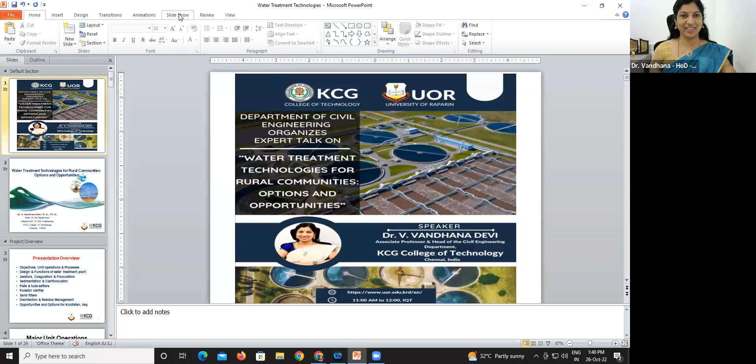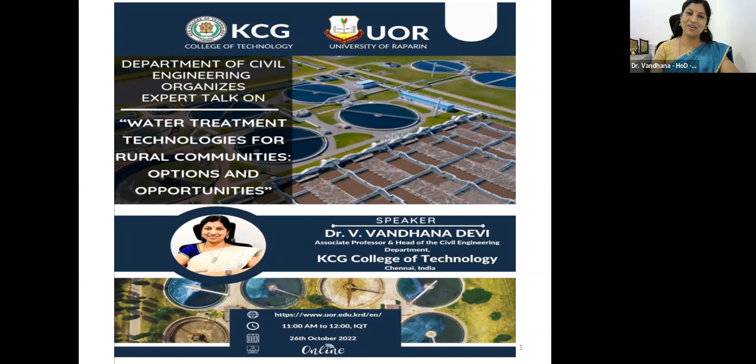Thank you so much for giving me the opportunity to deliver an expert talk on water treatment technologies for rural communities, especially for regions of Iraq, parts of Kurdistan near your university. What are the options and prevailing opportunities? I would like to deliver this topic for the benefit of budding civil engineers.

Let me proceed. So sir has given a brief introduction about myself. I'm heading the civil department at KCG College of Technology, which is located in Chennai, India.

My presentation will be about the objectives of unit operations and process, and then I'll elaborate on the design and functions of water treatment plants - operations like aerators, coagulators, flocculators, and the principle behind sedimentation and clariflocculators. What are tube and plate settlers? What are pulsator clarifiers? And we'll move on to sand filters, like rapid sand filter and slow sand filter, the types of filters we have. Then the final topic will be about disinfection and residue management, and we'll discuss the opportunities and options for Kurdistan, Iraq.

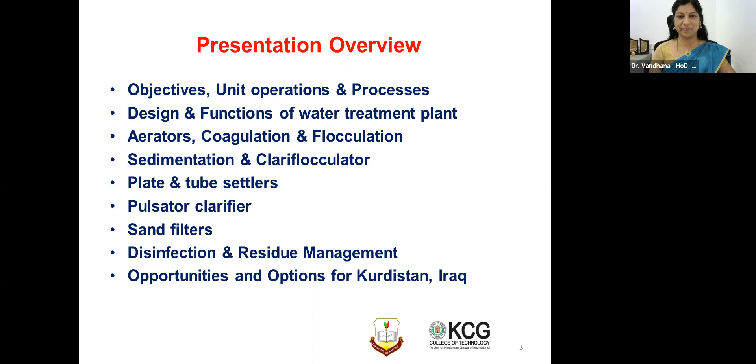Yes, coming on to the water treatment operations. Before I start with the unit operations and process, I would like to emphasize the objectives of water treatment. I was told all of you are civil engineering students, and some of you may be thinking civil engineering is just construction - construction of buildings, development of infrastructure, that's all, right? But we don't stop with that. I always say civil engineers are only next to God. Okay, so we are the boss.

To put it in simple words, we are taking care of the supply of water. When I say water, it is pure water - purified, treated water to the public. You can also imagine who is supplying water to your university. Just start thinking - who is working behind this water treatment process? It is the environmental engineer, who is a civil engineer, right?

Okay, so there are a lot of methods and processes in water treatment, right from the source. For example, the source for your water supply at your university will be the nearby river - I think it must be the Kosa river or the Aksu river. From there we collect the water and take it to the water treatment plant, which is being done by your Erbil Water Directorate. So you have three water treatment plants in your locality: Soren Water Treatment Plant, Kirkuk Water Treatment Plant, and Kani Water Treatment Plant.

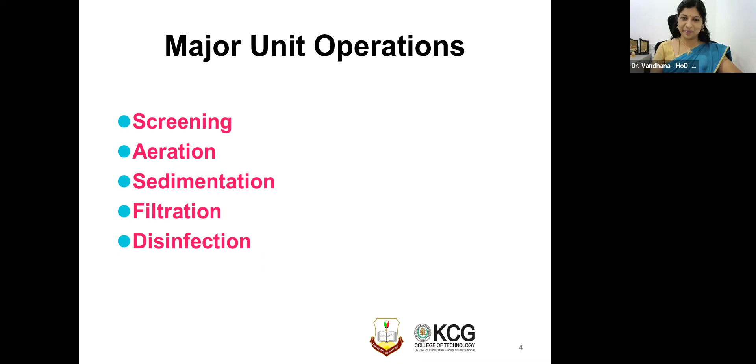Then comes the flocculator, sedimentation. All these tanks are meant for a simple process of settling. The heavier particles settle down.

Sedimentation is otherwise known as settling due to the gravitational force. In order to speed up the process of sedimentation, you can add coagulants like aluminum sulfate, Al2(SO4)3, 10H2O, so that the detention time will be reduced. For example, the plain sedimentation tank, if the detention time is 6 hours, if you are adding coagulant, then it becomes 2 to 3 hours. 2.5 hours will be the detention time for a coagulant tank.

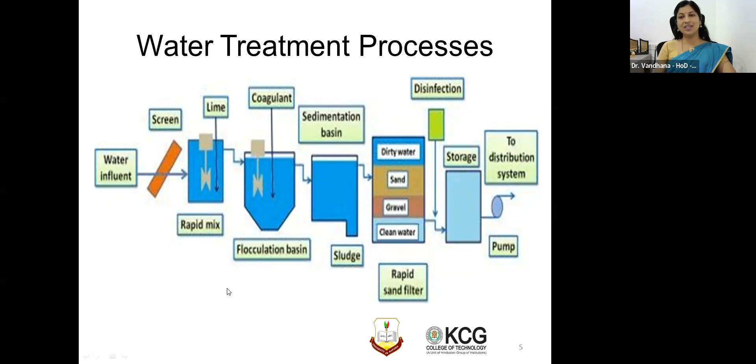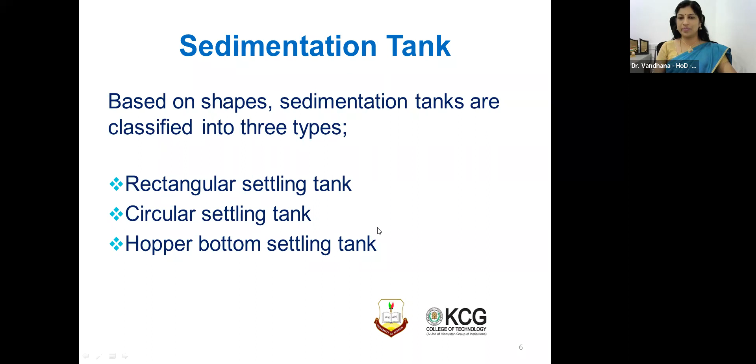Let me move on to the sedimentation tank. So based on the shapes, we have three types. One is rectangular, then comes circular, and then hopper bottom settling tank. Sedimentation tanks are also known as settling tanks.

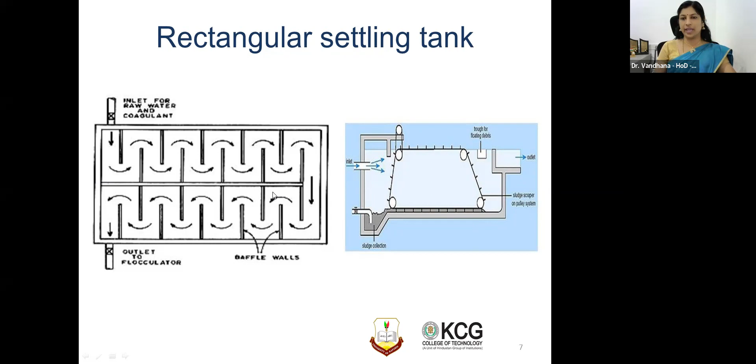Hope all of you know what sludge is. Sludge is a semi-solid material, something like waste, obtained from the water treatment process. The heavier particles settle down, and over a period of time, say a week or within a month, they form a semi-solid material. That is known as sludge.

This sludge is rich in nutrient value, and you can even use it as fertilizer or manure for your trees and gardens. In fact, in Chennai, we have started using it as manure, and this is a small scale business. In our campus also, we have a water treatment plant and a wastewater treatment plant. The sludge obtained from the tanks is dried in the hot sun and then sold, and also used as manure for our own gardens within the campus.

So you guys also can plan something for your university campus. If it is already done, that's well and good. This sludge has got 98% nutrient value, which is very good for the growth of plants and other trees.

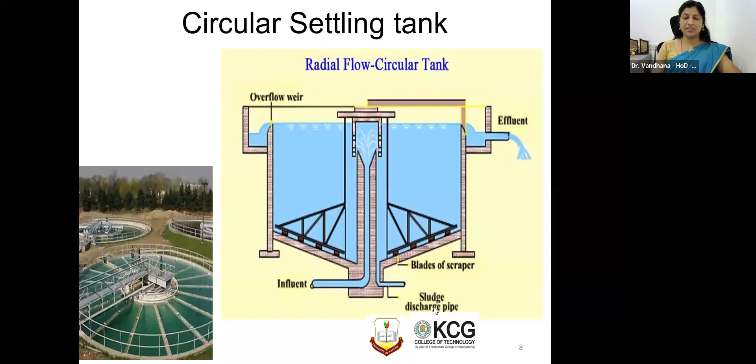When I was focusing more on the concepts, sir told me to throw light on the design of a few tanks. So let me start with the design of the sedimentation tank. Before we get into any design, we must know what the design criteria is.

In this course, whatever we discuss, every design has got certain design criteria. In simple words, they are nothing but assumptions. If we are thorough with the assumptions, then easily you can design the tank. It is not like reinforced concrete structures or steel structures. Here, most things are assumptions, and those assumptions are based on repeated studies conducted by fellow researchers and also by practicality. You will get that idea, I'll tell you.

The first one is the detention period - how long the water is going to detain or retain in your tank. For plain sedimentation, as I told you, it is 3 to 4 hours. And for coagulated sedimentation, it is 2.5 hours.

Then comes the horizontal velocity of flow. It should not be more than 30 centimeters per minute. Then coming to tank dimensions - when I say design, you are going to design the length and width of the tank and also the depth. Always the length is 3 times the width, or 5 times the width of the tank. The length is always bigger. So you can assume L is to B as 3:1 or 5:1.

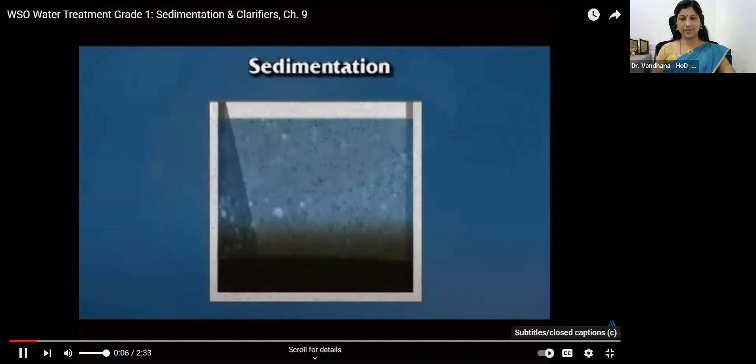Hope it's visible. Once proper floc has formed, it must be separated from the water through sedimentation or clarification. This process takes place in a rectangular, square, or round tank called a sedimentation basin or clarifier.

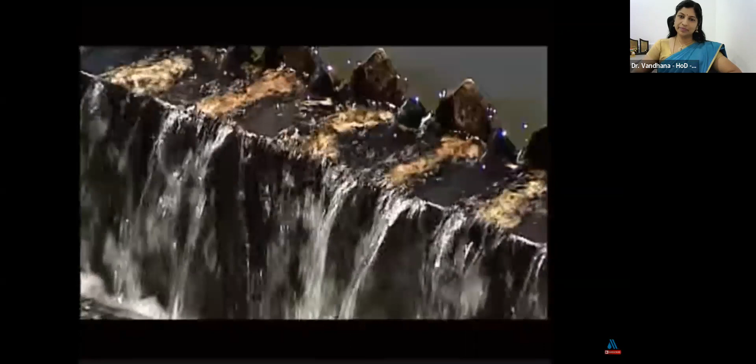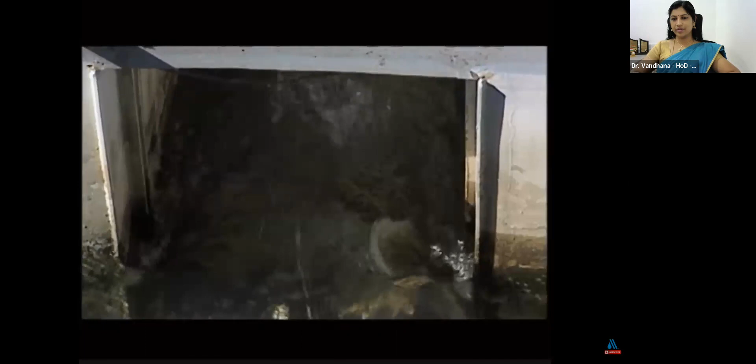It should be noted that direct filtration plants do not include a sedimentation or clarification unit process. Solid particles are kept in suspension in water as long as it flows with sufficient velocity and turbulence. Sedimentation removes floc by slowing the flow of water and decreasing turbulence. The heavier floc particles drop to the bottom and clarified water is collected from the top for filtration.

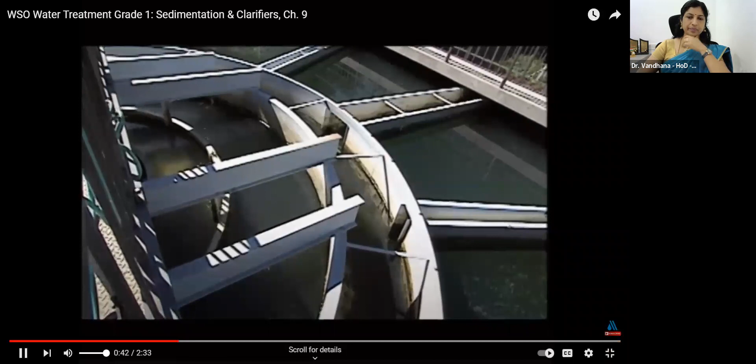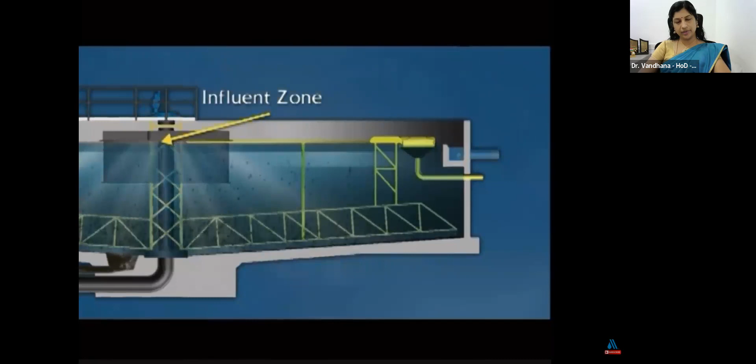Traditional sedimentation basins have 4 zones. First, the influent or inlet zone decreases the velocity of the incoming water and distributes the flow evenly across the basin. Second, the settling zone provides the calm area necessary for the suspended material to settle.

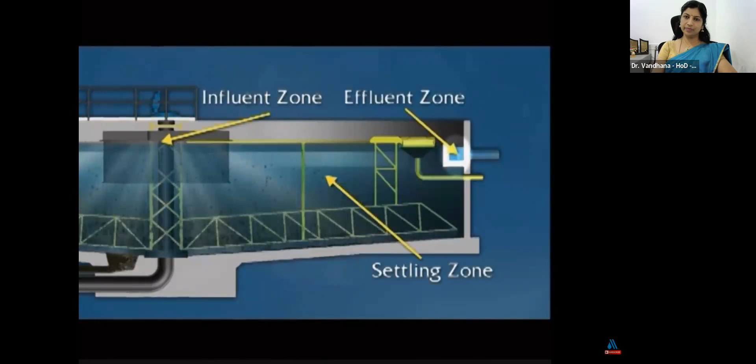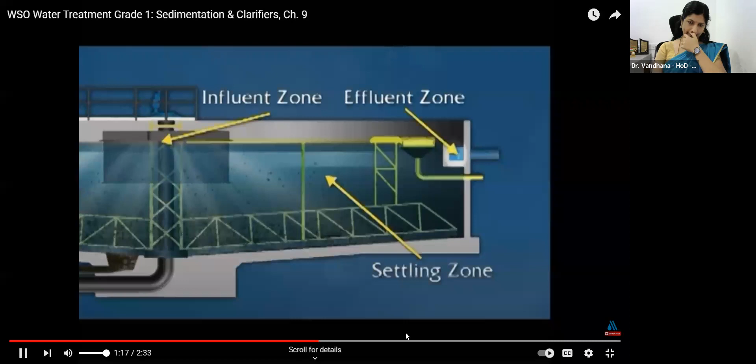Third, the effluent zone provides a smooth transition from the settling zone to the effluent flow area. It's important that currents don't stir up any settled solids and carry them into this area. Fourth, the final zone is the sludge zone, where settled solids are separated from other particles in the settling zone.

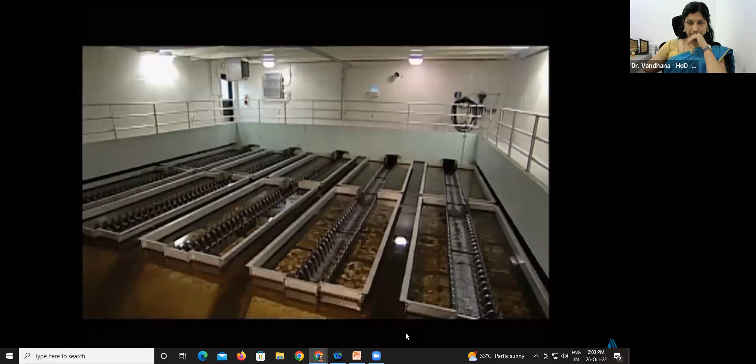There are many variations in design for sedimentation basins. The two most common types are rectangular and circular clarifiers. In a rectangular clarifier, water flows across a rectangular basin.

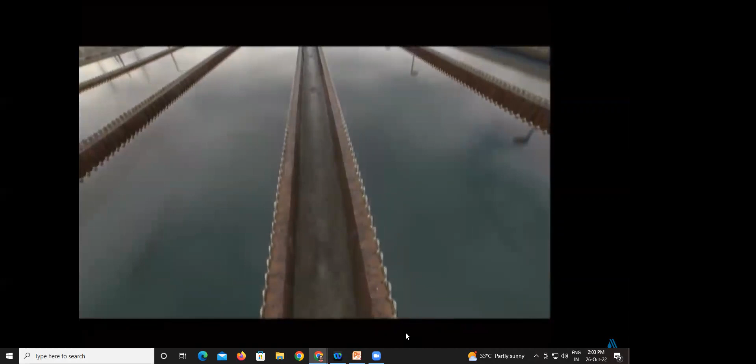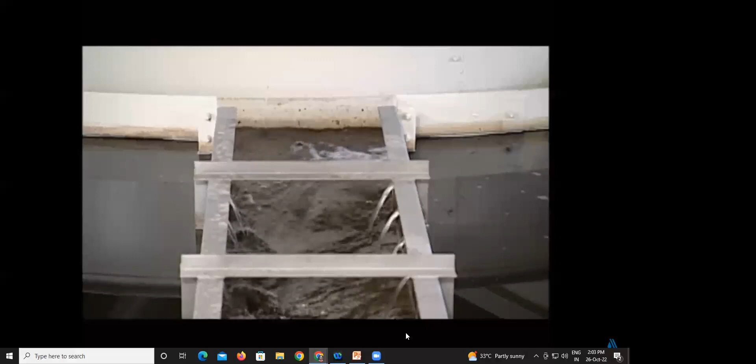A circular sedimentation basin can be either center-fed or perimeter-fed, where water is introduced to the clarifier in the center or on the perimeter, where the water is allowed to flow unperturbed throughout the basin.

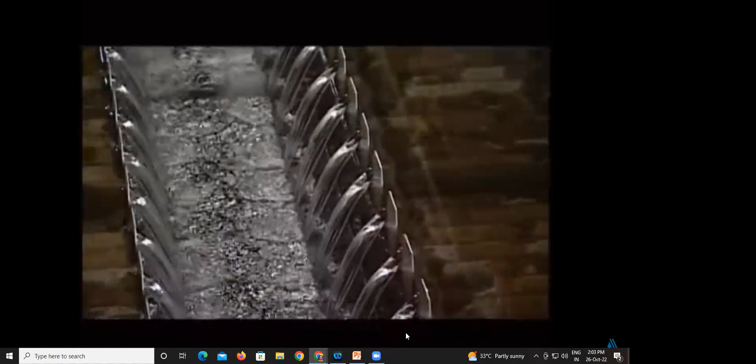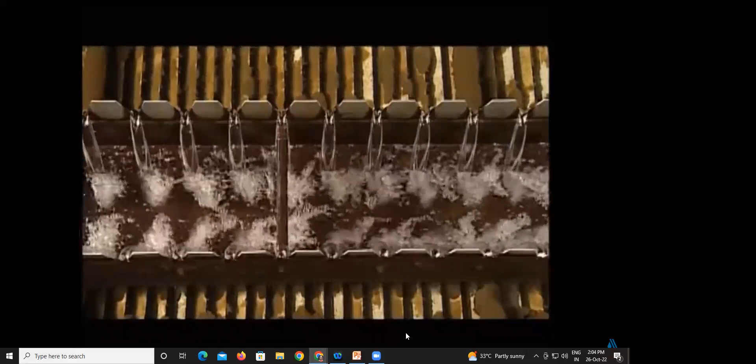Plates and tubes may also be used to increase the surface area available for settling, allowing for increased flow rates and enhanced settling in a smaller basin. As water travels up through them, instead of having to settle as much as 10 or 15 feet, particles have to settle only a matter of inches to reach the surface of a plate or tube.

As particles continue to settle out and build up, they can slide down the tube or plate and eventually settle to the bottom of the basin.

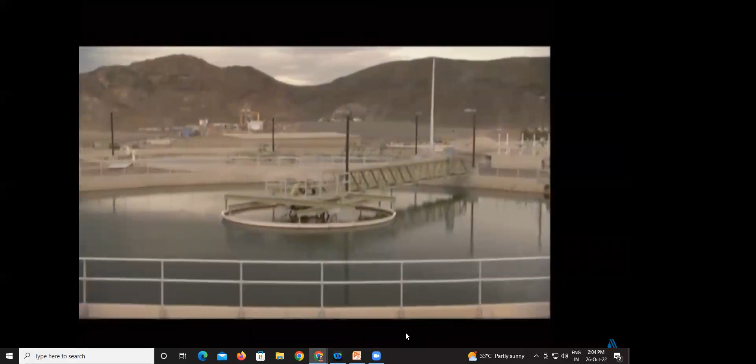Yeah, hope you guys got some idea. Somebody recently asked me how this works, right? What would... sorry, just give me a second.

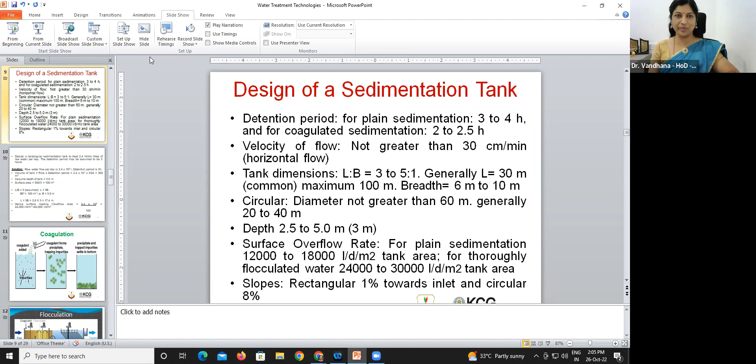So let's move on to the design now. Hope all of you are clear with the working principle of sedimentation tank and the design criteria of sedimentation tank. Fine, let us see the design problem.

We are going to design a rectangular sedimentation tank for treating 2.4 million liters of raw water per day, and the detention period may be assumed to be 3 hours. This is what is given in the problem. Sometimes they will just give you the population, for example, design a rectangular sedimentation tank for a population of 1 lakh. That's all that will be given in the problem.

And the rest of the parameters, everything we are going to assume. In this case, detention period is given; if not, we can assume it as 2.5 to 3 hours. So the first step would be to determine the volume of the tank.

The volume is given by the flow, which is already given in the problem, into the detention period. In this case, it is 2.4 into 10 power 6 liters. We are going to convert liters to meter cube, just divide by 1000, since 1000 liters is 1 meter cube. Then multiply it with the detention period, which is given as 3 hours. This 24 is nothing but the 24 hours in a day.

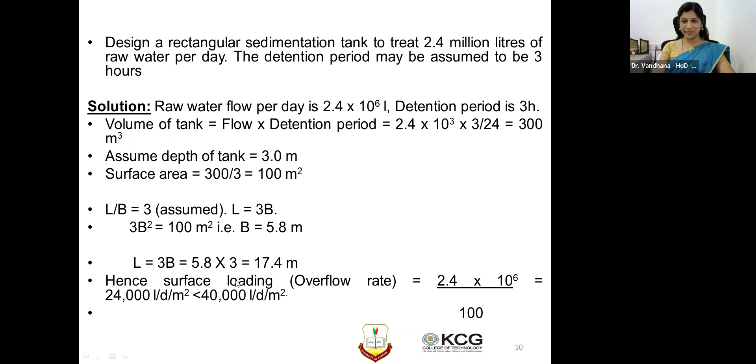Hope this is clear to all of you. Any doubts you can ask me during the query session. Shall I move on to the next slide?

Next is the coagulation. So what is happening in case of coagulation? You guys got some idea about sedimentation, right? The theory of settling - you have type 1, type 2, type 3 settling and so on. Similarly, the next process is coagulation, so we are speeding up the sedimentation process in simple words.

Coagulants like aluminum sulfate, alum, will be added so that the impurities get connected to that. The coagulant forms precipitate, trapping all the impurities. Mixing takes place, and finally it precipitates and the trapped impurities settle at the bottom of the tank. Same principle like sedimentation - here you are adding the coagulants so that all the impurities are trapped and then they settle at the bottom of the tank.

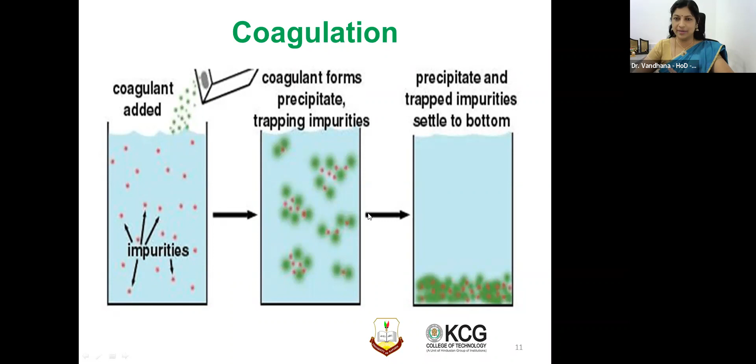That's it. So this coagulation is a very important concept. Then comes the flocculation.

So we have flocculators where all these paddles are rotated, for example 50 rotations per minute, so that we introduce oxygen by the process of aeration. Then on the top of the tank, flocs are formed - F-L-O-C-S. Flocs are nothing but like big lather when you use soap for washing clothes.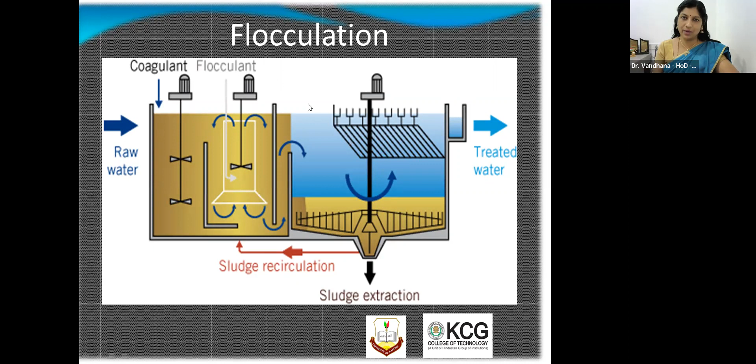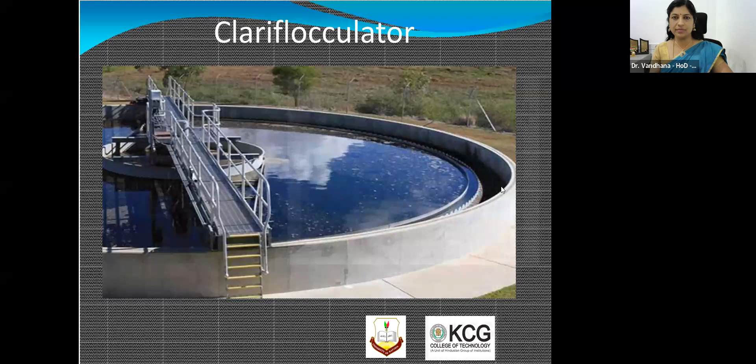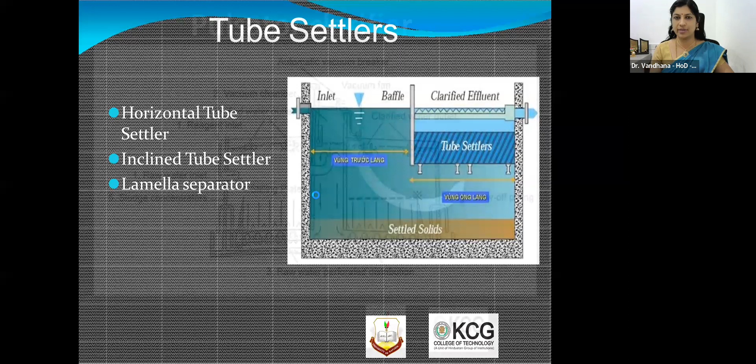So these tanks everything work on the principle of settling due to gravity. At last you get the clarified effluent, and then it will be taken to the next operational process. This is also a clarifier. So this settling tank, clarifier, flocculator - everything works on the same principle of gravity.

Then comes the filtration - a very interesting and important unit operation. As I told you, this is the treatment done by physical method, right? So you are going to filter - all the impurities will be removed by the filtration method.

So two types are there: slow sand and rapid sand filter. I'm not going to touch upon the process of filtration, I'm just going to elaborate on the types of filters. Coming to the process, we have mechanical straining and sedimentation of particles. Biological action takes place, and by electrolytic action also filtration occurs.

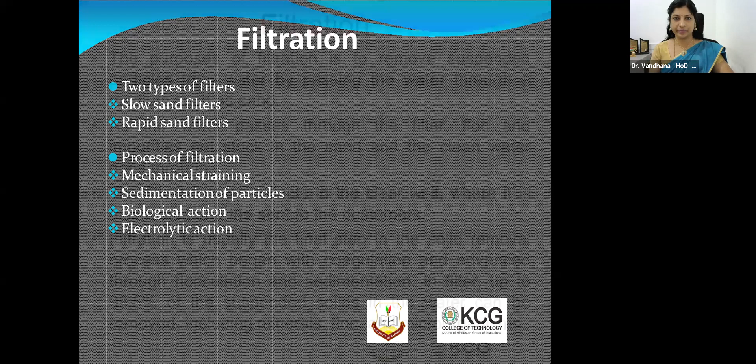So what is the major objective of filtration? It is to remove the suspended particles from the water by passing the water through a medium of sand. It could be sand, gravel, coarse sand, and so on. So depending on that only, we decide the filtration units.

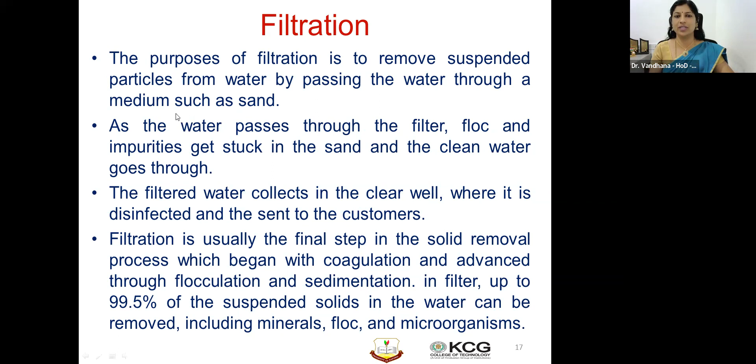On top you have coal or anthracite - layers, for example 0.7 centimeters of coal will be kept at the top layer. And then we have sand here.

And beneath we have coarse gravel this way. These are all mediums of sand which act as a filtering media for the water to get filtered, and then they'll be collected on the top as wash troughs.

Finally, the filtered water collected at the bottom will be taken to the next disinfection process. So this rapid sand filter always needs to be backwashed, because during filtration, within 24 hours clogging will start happening. So as an engineer, we have to ensure backwashing of the filter takes place in order to remove all the clogs and pores, so that filtration happens without any interruption.

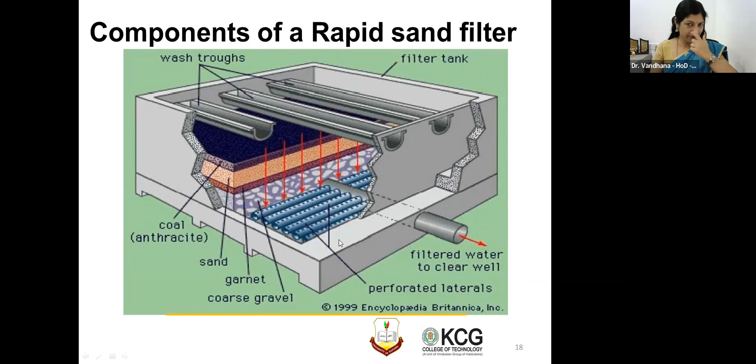Hope I'm clear to all of you. I'll show you the filtration process also as a short video.

So this is how I told you: coal, sand, and then at the bottom you have gravel. The particles are arranged in layers, and then under drains. This is the under drain system from where the water will be collected.

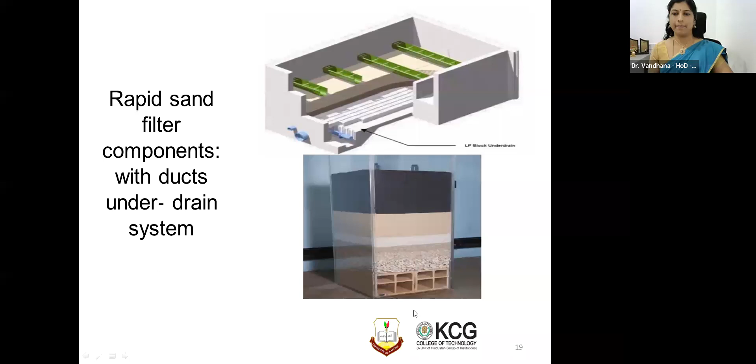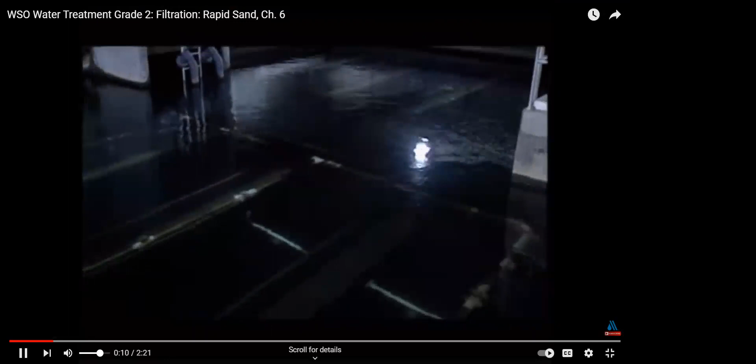Yes, it's okay. A complicated but much faster method is rapid sand filtration. Rapid sand filters operate up to 40 times faster than slow sand filters, but require a higher level of monitoring and control. Rapid sand filters aren't as deep as slow sand filters. They consist of a 6 to 18-inch bed of gravel covered with a 2.5-foot layer of sand. Rapid sand filters have no schmutzdecke.

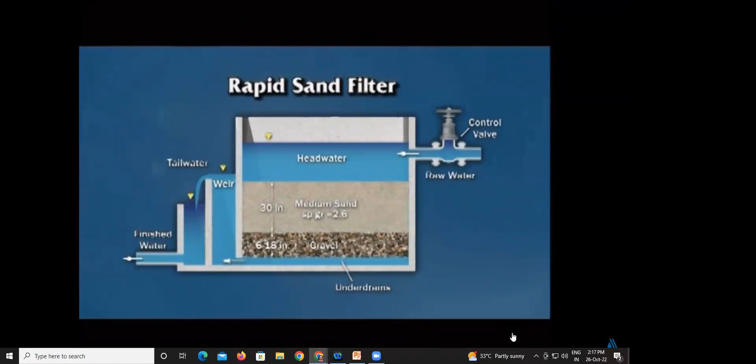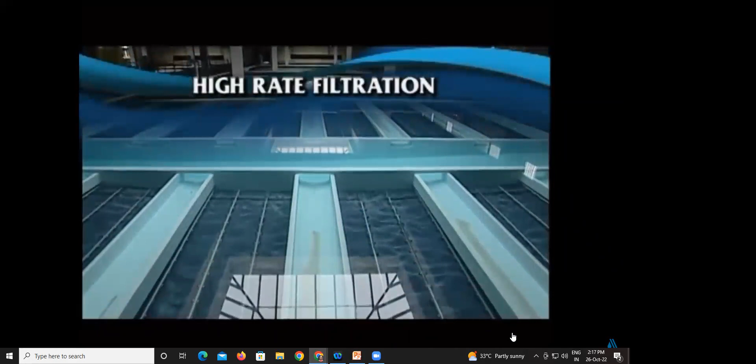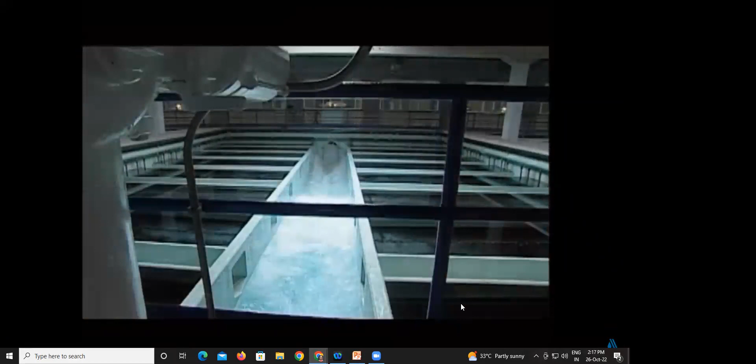Rapid sand filters are more efficient than slow sand filters, but still require a larger footprint than more modern systems. For even more efficient filtration and higher flow rates within a smaller footprint, many utilities use high-rate filters. These filters use layered media and can produce up to 4 times the flow rates as rapid sand filters. There are several types of high-rate filters: dual media, multimedia, and deep bed monomedia.

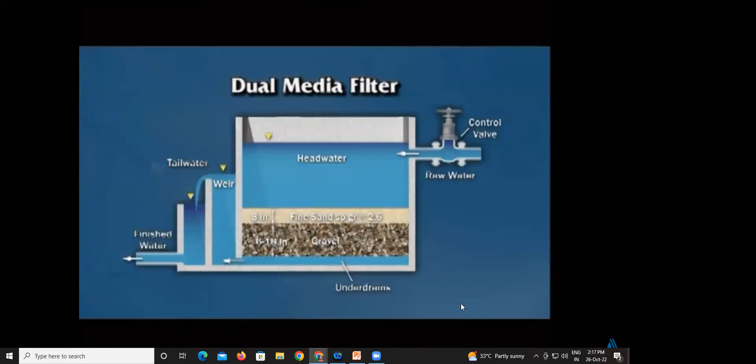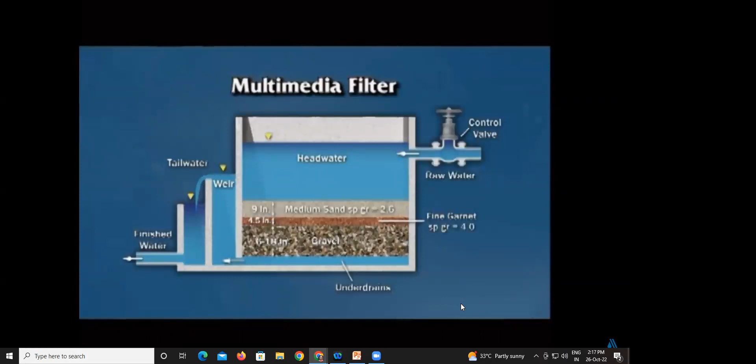Dual media filters consist of a bed of sand covered with a layer of granulated anthracite coal. Multimedia filters are similar to dual media, but use 3 or more types of material. The most common configuration is a layer of garnet sand on bottom, silica sand in the middle, and coarse anthracite on top. In both dual and multimedia filters, different types of media are layered on top of one another.

Generally, the larger the particles of a media, the lower it will be located in the filter. Gravel, which forms the base of most filters, stays at the bottom because it is larger and heavier than the sand on top. And the higher you go in the filter, the smaller the particles become, with the exception of anthracite, which is found at the top. Anthracite has a lower weight per volume ratio or specific gravity, so it's able to sit on top of the smaller but denser sand particles below.

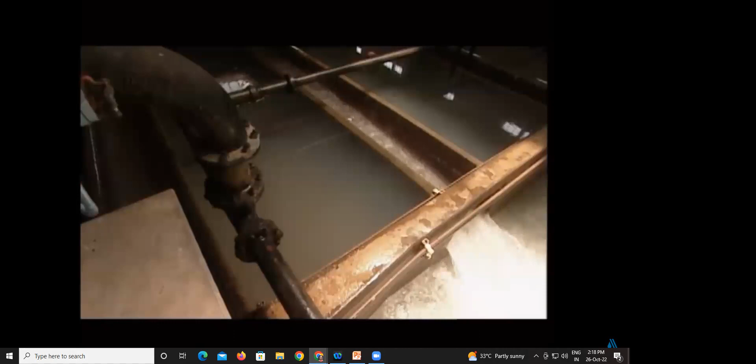Some mixing does occur at the interface level, but different media types generally remain stratified. The coarse anthracite layer at the top removes most of the suspended particles. What passes through is removed by the lower layers of media. The result is more of the filter depth is utilized for particle removal.

Yes, got some idea about how the filtration process is happening.

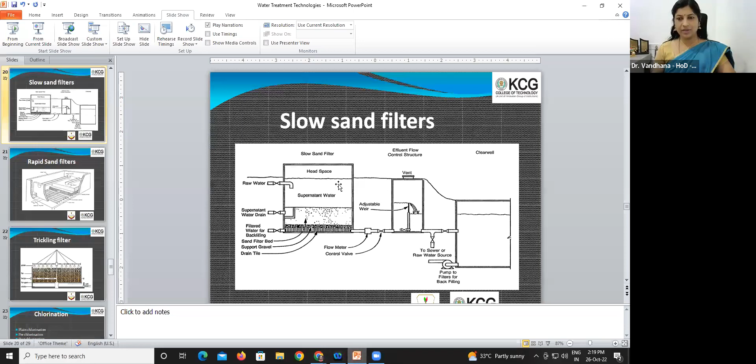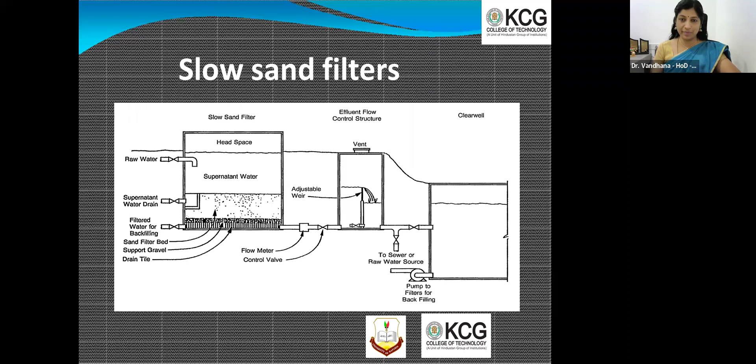Okay, so as I said, we have 2 types of filters: slow sand and rapid sand filter. One major disadvantage of the slow sand filter is it requires enormous amount of space. In small towns or villages, where the land rate is not that high, we can go for slow sand filters. For cities, the usage of slow sand filters has become obsolete, I would say. That's why we have gone for rapid sand filters, which require smaller space and are more efficient compared to slow sand filters, 40 times faster and more efficient. So that is why we prefer designing rapid sand filters for any town or city.

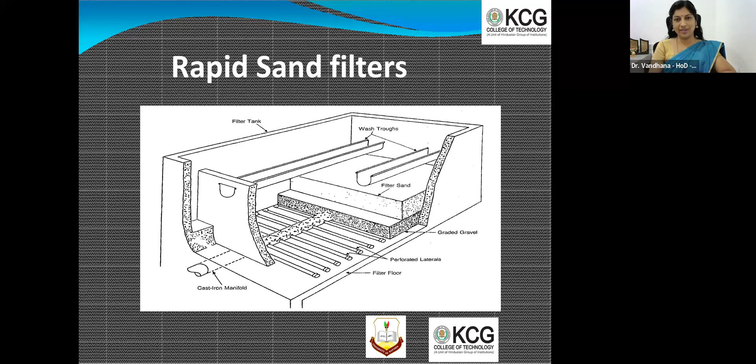And when we design this, the backwashing has to happen every 24 hours, and every day you take care of the backwashing process, by which the clogged materials will be removed. So as an engineer, when you design, you have to provide a standby unit. For example, if we have 5 filters as per the design, always provide 1 more filter as a standby unit, so 5 plus 1, 6 filters must be provided. That is how the design of rapid sand filters goes on.

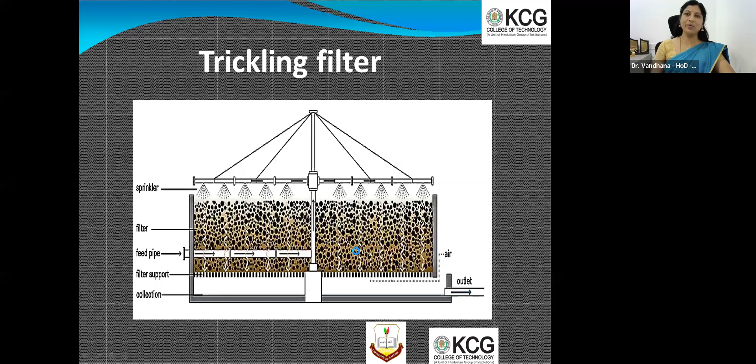Okay, and this is trickling filter. I need a separate session to discuss the design aspects of trickling filter, so I'm not touching upon that right now. We'll have a look at how backwashing is happening before I go to chlorination, and then one more topic with that I'll wind up.

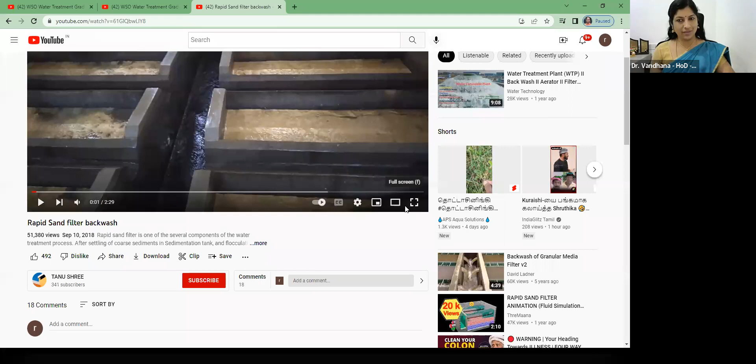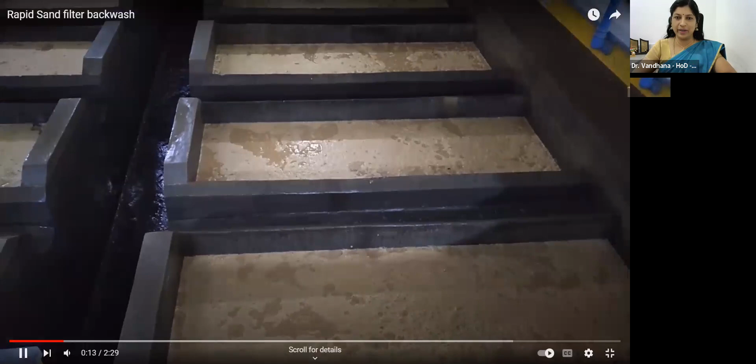Yes, this is how backwashing happens in a rapid sand filter. Just a 1-minute video, we'll just see. So this backwashing must be done every 24 hours. Just forwarding it.

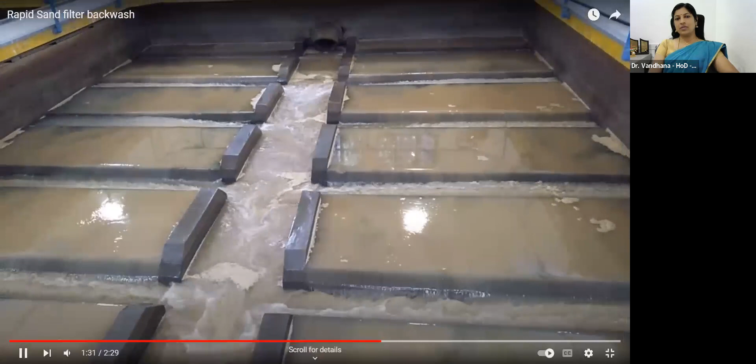So this backwashing is done in order to clean all the pores so that no clogging happens in the rapid sand filter.

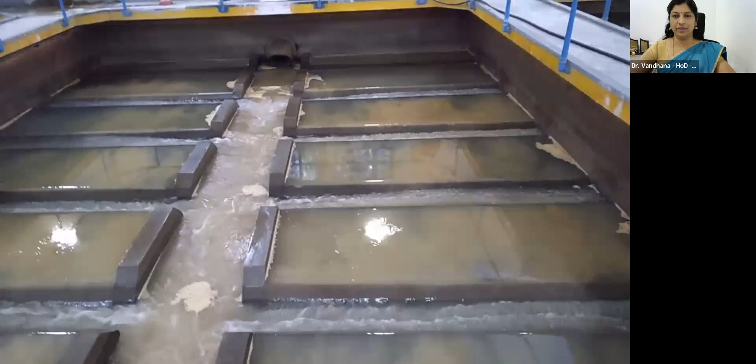Okay, so this is how backwashing happens in a rapid sand filter.

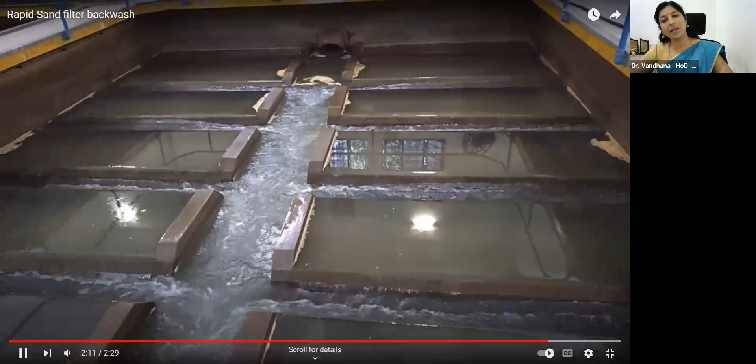So now the water is filtered, and it can be taken to the next operation and process, which is disinfection.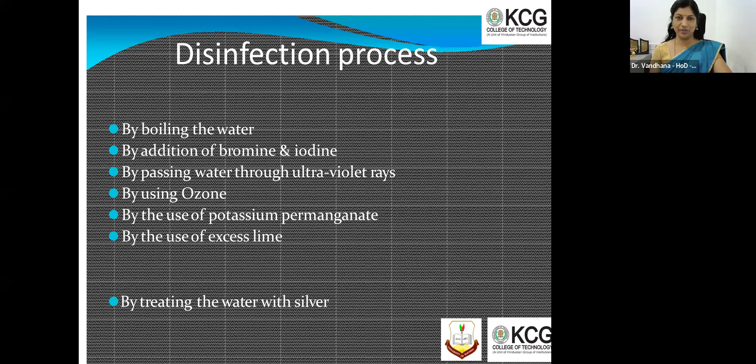I can call this the disinfection process, methods by which harmful bacteria can be removed. Then the final, last step is residue management. By doing all these unit operations and processes, residues are formed.

This residue is nothing but sludge. So how are we going to manage the sludge? We can condition the sludge, remove water from it through dewatering, dry the sludge and make use of it as manure, as I told earlier. We can go for stabilization of the sludge. Incineration means you just burn it off, but don't do that—it is not an environment friendly technique. Finally, we can dispose of the sludge.

To summarize, what are the options for your place, for Kurdistan, for your university? What can be done? What is being done in the water treatment plants in your locality? As an engineer, you are all budding civil engineers. Within a year or two, you are going to be placed in a water treatment plant also. We don't know. So what are you supposed to do?

See to it that you make use of the resources available locally. For example, if you are coming to India, you have to understand the climatic conditions prevailing in that zone. Suppose you are placed in the United Kingdom—the temperature conditions there and in Iraq are totally different. I was told by your faculty that you go through even 48 degrees during summer. Here in Chennai also we touch 40 maximum. So depending on local resources and conditions, and how to fulfill local requirements, we have to decide the options.

You can make use of the skills available locally in your area, and whatever technology we adopt, it should be socially acceptable. A good example would be reuse of wastewater. In our place we have started reuse of wastewater for gardening only. I hope the same prevails in your place too. But in cities like Singapore, they have started reusing treated sewage water for bathing and washing clothes. Hope all of you can accept it. The people of Kurdistan or the people of Chennai are yet to accept it socially.

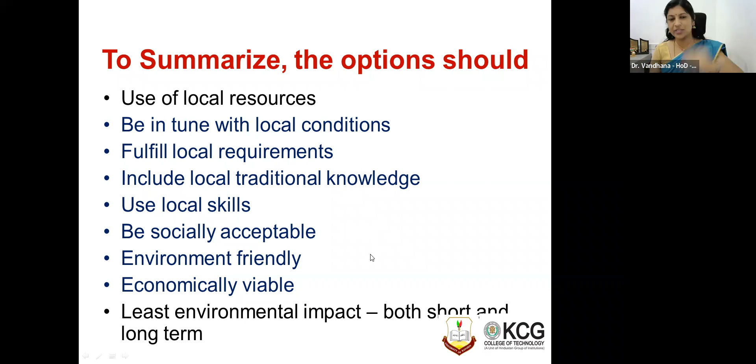So when you decide the options, please ensure all these points are taken care of.